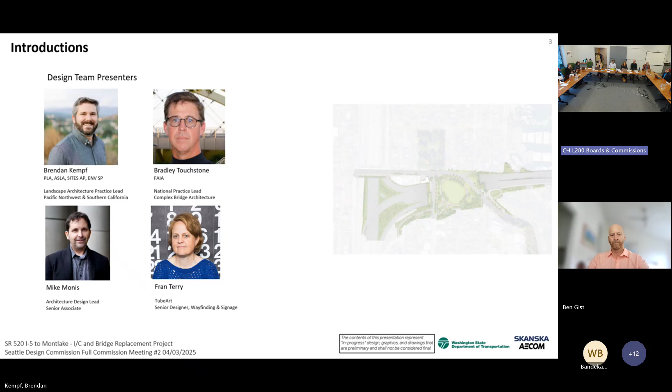So, to pull it all together, we did a quick presentation of introductions for the design team. The four of us will be the primary presenters today. We'll dive right into the project overview.

So you see here, just an overall illustrative plan of the project. This is the final piece of the SR 520 project, kind of the capstone piece: bridge replacement for the Portage Bay Bridge itself, and then connections with the prior project at Montlake, a new lid and open space connecting the Roanoke Historic District, North Capitol Hill, as well as improvements at the I-5 interchange, including a pedestrian bridge that will improve connectivity to East Lake. That topic was covered extensively in our last meeting. Today we're going to focus primarily on the balance of the project.

So zooming in here on the west side, just to highlight a few things. We have the I-5 Roanoke Trail Crossing Bridge I just mentioned, the fire life safety building, the overall lid and open space. And then heading off eastward, Portage Bay Bridge itself, the new bridges, as well as the connector bridge that leads to the shared use path that will be on part of the South Bridge.

As we span across Portage Bay itself, you can see the two bridge structures side by side. And then as we approach the east side, the Montlake connection, connections to the existing Bill Dawson Trail, the Montlake Tunnel, as well as other circulation and connectivity to the neighborhood fabric there.

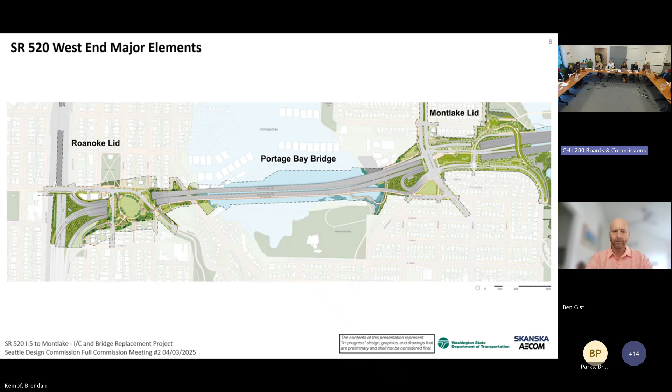We zoom out for a moment and take in the full context. The SR 520 trail network is one of the backbone elements of the project. We're actually extending it all the way across Portage Bay to North Capitol Hill and the Roanoke District, helping to facilitate further connections outward into the community and future connections that will help bring commuters, casual cyclists, and travelers even as far south as downtown.

So the SR 520 bridge all the way across Lake Washington includes the shared use path. The Montlake project continues that through Montlake, and then we are that last piece.

One of the driving inspirations for the project overall is this idea of a distributed network, kind of a river delta, as you hit an arrival point, which you'll see a little later. Really, all of these potential directions that users will be able to go, enhancing the connectivity for everyone using that 520 trail.

The project overall has had many touch points with the Seattle Design Commission going back 6 years or more. It's really a long-term project and vision. Today, we are in the midst of the design build process, so that was a selection with WashDOT. The SDC has been involved, so we have ongoing meetings and workshops with the Design Commission to review design progress as we finalize the design here.

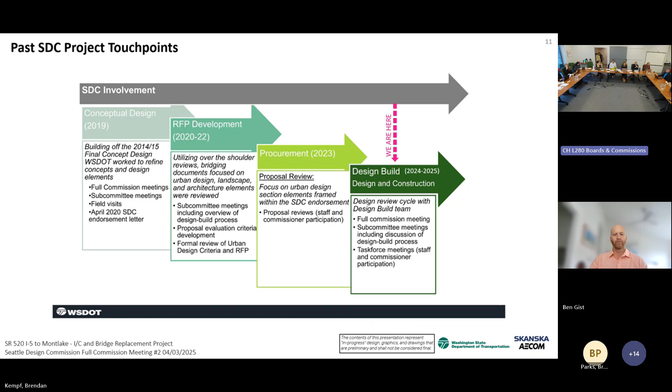That will go through, once submitted, a WashDOT and City of Seattle review process. We'll receive comments back, develop the final design, go through another review cycle, and then the drawings will be released for construction. There are aspects of the project already released for construction, some of the early works that's ongoing, which some of you may have noticed. And then a lot of this urban design, architecture, and landscape architecture will be coming online a bit later.

So our urban design review plan - today is April 3rd, so this is our fourth official touch point with the commission. And we have a couple more upcoming later this spring.

This highlights some of the major topics. You can see we're really focusing on the bridges themselves, the ancillary bridges, the fire life safety building, as well as a design update and progress related to the open space and the overall urban design of the project.

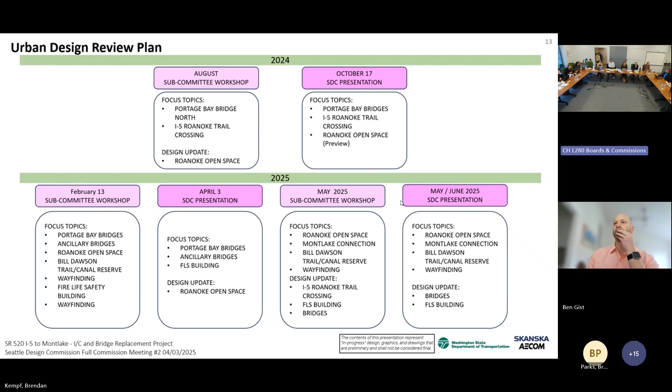When we get to the next couple of meetings, it'll be a deeper dive into the overall urban design and landscape architecture. Some of the major things we'll be focusing on in those next couple of meetings are the materials and finishes, the planting design, gateway elements, and the overall experience and wayfinding. So you may find that some of these topics are not discussed in depth today, but they are coming.

Overall, in terms of connectivity, this is a great diagram. It starts to illustrate that idea of the river delta we looked at a few moments ago, especially as we approach the west side of Portage Bay. We really have our delta moment here, which we'll share in more detail as part of this bridge that will connect from Portage Bay Bridge up to the street level of Del Mar. You see all these connection opportunities, whether it's going north to the Roanoke District, south to North Capitol Hill, west to East Lake, and further afield.

The Montlake connection portion also has tight connections into the Montlake district, as well as additional connections into the community and neighborhood beyond.

So you're looking at Montlake, the existing connection here dashed in as you go through the Montlake project. We'll be talking, starting out talking about this Montlake connection, as well as the Bill Dawson Trail and the underbridge experience there.

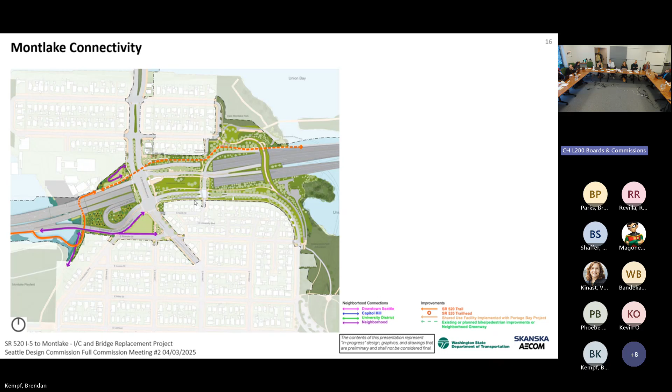Zoomed in a little bit here on the east side. Again, I was describing a moment ago that delta idea, all of the connection opportunities that come off of this trailhead here, you see with the white dot.

And then set the stage for some of the things that we'll keep going back to: wall finishes, really picking up on design language from the Montlake project. So the Montlake ledge, which has these ledges that protrude outward, primarily roadside walls. On the back side of those walls, we have the inverse of that, so a slight impression into those walls. And then where we have pedestrian scaled spaces, this adze pattern, more texture, as part of that pedestrian and cyclist user experience.

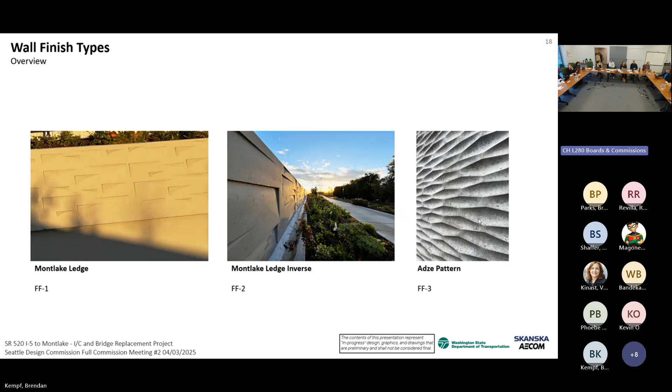There's a number of walls throughout the project, and we've been working with WashDOT and the overall design and construction team on some refinements relative to the original concept design. Won't get too deep into this right now, but the main driver was consistency with some of the surrounding conditions. Where there's battered walls intended for roadside walls, where there was an opportunity to tie into the existing condition, they really ought to be vertical. So a subtle change, but we'll talk about that in more detail at a couple key locations and why that's so important.

Again, the design language picking up from Montlake, a series of various types of lighting fixtures and railings, carrying that same theme through this project with a couple of additions.

We'll have the bridge columns along Boyer. They'll actually be uplit from the bottom rather than washed from above. And then we've also introduced this transitional fixture, which is among the kit of parts for SCL, but helps immeasurably on the west side of the project in terms of spacing, and we'll touch more on that here.

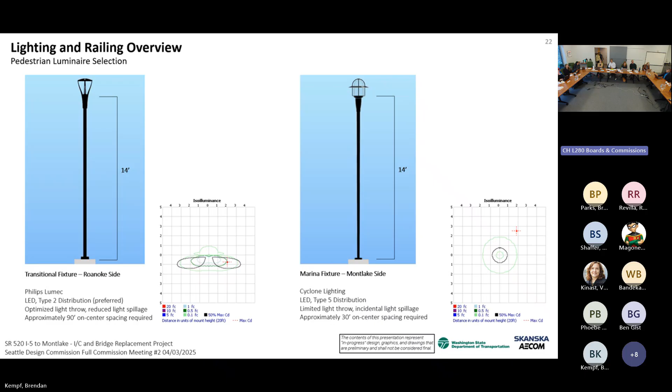Continuing the kit of parts, the design language family, we have a handful of site furnishings and amenities: a single grill, a single drinking fountain at the Roanoke lid, as well as benches that harken back to—one of the things that's so special about our project is that it is linking two legacy Olmsted Brothers projects, which is tremendously exciting for us all.

There's Roanoke Park directly north of the lid, and to the south we've got Interlaken Boulevard. So this opportunity to pull in that design language, the World's Fair bench, part of the design language in the park, even that continuity, is something we're really excited about. We also have the City of Seattle standard trash, recycling and compost receptacles, bike racks, and removable bollards.

And this is the kind of first look at the sign family that we're looking at implementing across the whole project, from the pedestrian level.

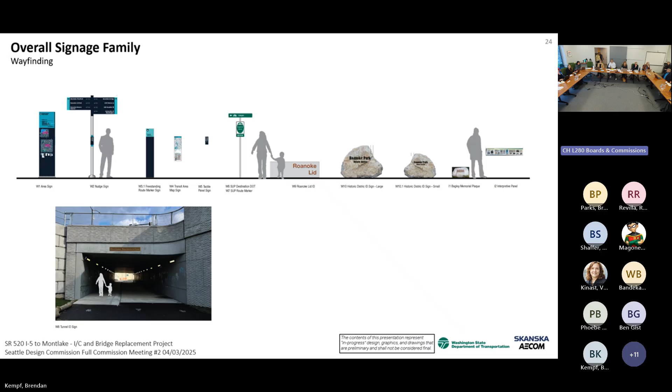So we'll dive right into the Montlake connection. At the Montlake end, it's a smaller sign family because it doesn't include the historic district or the interpretive signage, which has already been done in the Montlake section of the project. So this is just a smaller set of signs at the Montlake end. This is a schematic look at where some of the signs are located along the main pathways where people are going to travel.

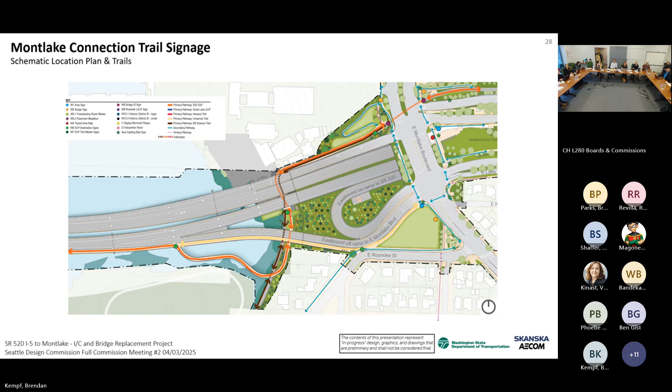You've probably picked up on the fact that connectivity and circulation are underpinning elements throughout the project. Here at the Montlake connection, zoomed in a bit more, you can see the Bill Dawson Trail in dark blue, the neighborhood connections in purple, the SR 520 trail in darker orange, and the lighter orange showing the new shared use paths that will be incorporated and implemented as part of this project.

In terms of bike and pedestrian access, you can see numerous lines here - there's a big focus on this. We've got pedestrian access points, and there's a single stair that provides a shortcut from the grade change at Montlake Boulevard down to the Bill Dawson Trail, going through the tunnel underneath Montlake Boulevard. In blue you can see the bicycle circulation. All these routes are primarily accessible - we do have the single stair, but the slope of these routes is under 5%, so this part of the project does not include any ramps.

As we zoom into that initial connection from Montlake Boulevard, a couple of key elements: we have the stair I mentioned, and we have a switchback path, less than 5% grade, that brings you down to the level of the shared use path, the Bill Dawson Trail.

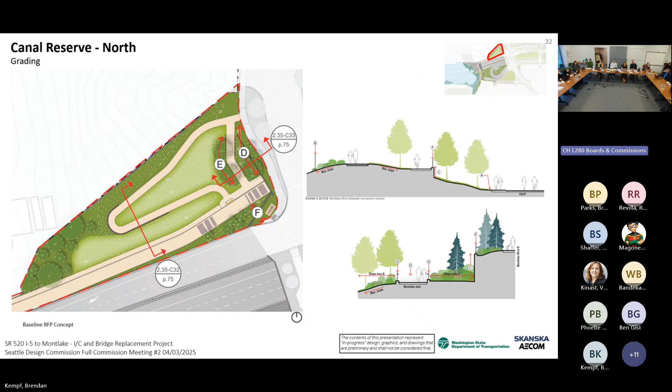These graphics illustrate the initial design concept, the baseline we started from, and then the proposed refinement. The key difference: in the baseline RFP concept shown in the small window upper left, the wall element at the switchback trail is a bit smaller, with a proposed wall intended to deal with the grade change between the existing NOAA facility immediately north of this area. One refinement we're looking at is shifting that wall back to the trail, which you'll see in a couple of views, reinforcing the trail alignment and limiting any disturbance that would otherwise be needed for constructing that wall or negotiating grade changes at the property line.

From the Bill Dawson Trail, this is a view looking westward. You can see the Portage Bay Bridge off in the distance, and the switchback path leading up along with the stair coming down.

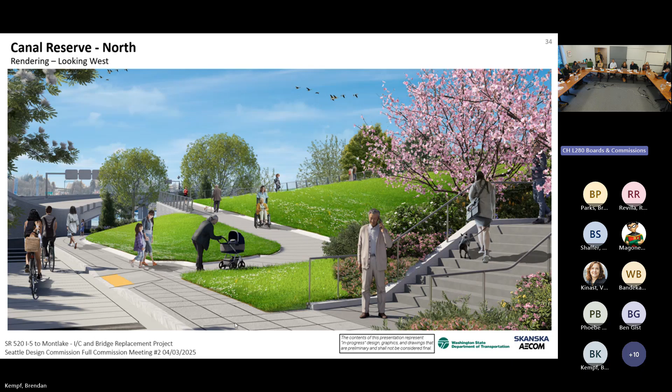As we go through this space, some design refinements relate to the walls. Initially, some of these roadside walls highlighted in light blue were intended to be treated as roadside walls with a 10-to-1 batter. Those walls also tie into fascia walls that help screen the bridge abutments and enhance the character of these under-bridge spaces. When we took a closer look, one proposed refinement was to make those walls vertical so that as they approach the fascia walls shown in cyan, there's a smooth transition rather than an awkward interface between a battered and vertical face. This series of diagrams highlights these walls.

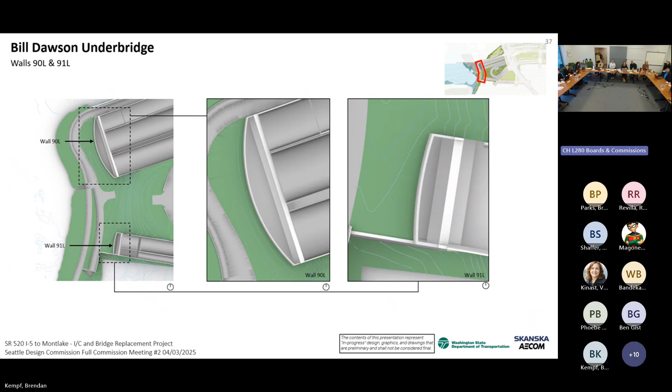But this also conveys that design language here for these two walls. They do have a subtle arc to them, and then as they have this return, they go back vertical and tie into those roadside walls that I just mentioned. So looking at the first one, the larger one, this is underneath the main bridge, the abutment.

Rather than having that kind of very utilitarian flat face of the abutment wall itself that's supporting the termination of the bridge, we have this fascia wall that will extend outward and just kind of reinforce the path alignment and this arcing experience through the space.

What you see here, these panels that are mounted to the wall are going to be a buffed stainless steel, so they'll have a reflective quality to them and play off of the underbridge lighting. There's a series of path lighting as well as girder wash lights that will help illuminate this space so it doesn't have that same dark character that the existing condition does. So it'll be a much more pleasant experience for cyclists coming through this space.

In terms of these reflective panels, they have varying sizes, so they kind of modulate up and down - kind of fingers that will stick up in between the spaces, between the girders, those girder bays. I mentioned that lighting going through there as well - it'll help illuminate the space, and the slight angle will allow some of that light to come back and hit the trail itself.

So we've been getting into some of the more technical details of how this will be constructed and fabricated, and you can see here just that kit of parts - from the actual face of these panels, the frame that's supporting it, how they're going to attach this. That outside face that's arcing is also still battered, so that helps give it more character.

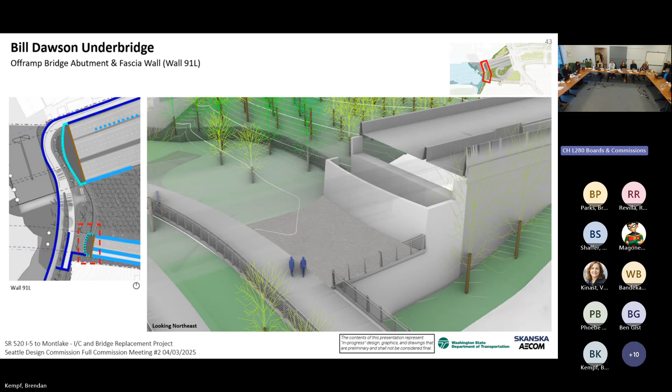A quick rendering of what that space will look like. Similar character, we do have the open space between the off-ramp and the main bridge that will be densely planted. And then we have the same kind of ground treatment and some of those habitat logs in the underbridge space.

Also want to point out the railing type here that you'll see in several places. This is the West Approach Bridge North railing type. That's another design language element that's carrying through much of this project when we're on the actual bridge structures.

Touch briefly on that space in between the off-ramp as well as an on-ramp and the main bridge. This continues to be in development here, but this is illustrating that baseline design concept that we had. The main change is that what you see at the inside of the on-ramp loop, there was a series of stormwater infrastructure elements. Those have actually been shifted to the outside of the loop, more conducive to some of the slopes, the pipe slopes, and how that drainage system would work. So there's going to be a service turnout on that west edge there.

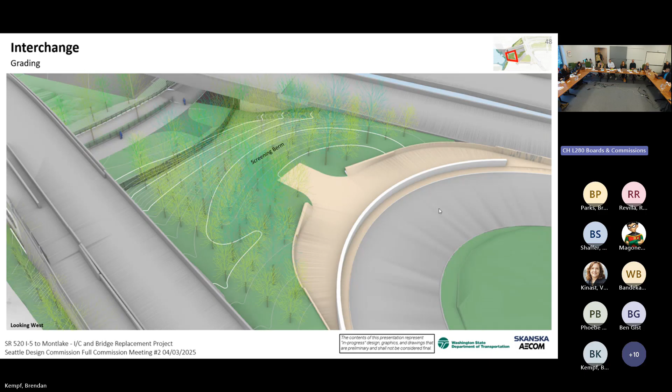Another view looking a little bit more westerly, back down to those same underbridge areas. And that kind of leads us to the bridges.

I'm going to have to stand up.

Good morning, I'm Bradley Touchstone, bridge architect with the design build team, and I want to carry you through the main bridge portion of the project. I'll touch on the overall design layout to give everybody a refresh of what the major components are, and then we'll touch on the ramp to the Bill Dawson Trail. We showed that diagrammatically last time, we've got a lot more refinements to that now. We'll also touch on the main bridge and some of the refinements and changes that have been made to it since you saw it last. And then we'll talk about the ramp to Delmar Drive, so really the overall, big picture of the total project.

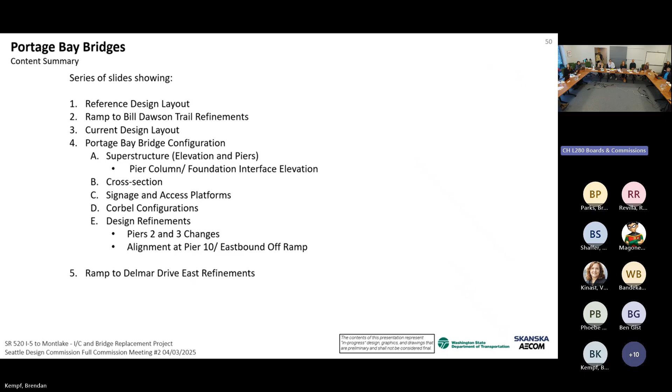These are the main components for what we call the Portage Bay Bridge, the main bridge project, which is the Portage Bay Bridge North structure, the Portage Bay Bridge South structure. We've got the eastbound off ramp, we've also got the RSUP ramp down to the Bill Dawson Trail, which is a separate structure, and then the loop ramp, which is the ramp to the Delmar Drive.

When we met last time, there was a request made that we show an overlay of how this compares with the existing alignment for the current bridge. So you'll see this is the Portage Bay Bridge North, which will be the first structure that gets constructed, and then the Portage Bay Bridge South, and then the red dashed lines are the outline of the existing bridge that's there today.

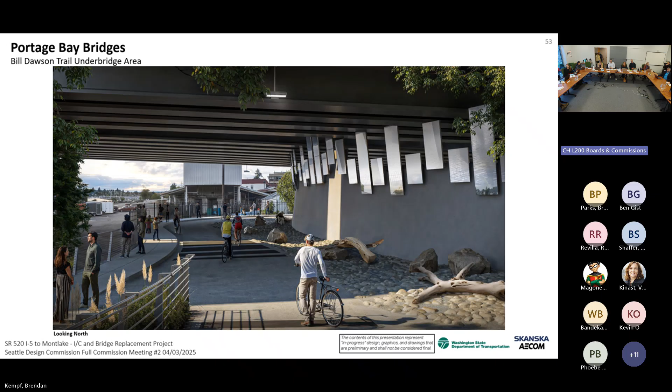Picking up where Brendan left off, what an amazing transformation. When I saw the existing photographs compared to what this space is going to be like, it's really pretty phenomenal. So as people are coming under the bridge on the Bill Dawson Trail, they're going to be able to connect up to the RSUP trail on the main bridge via the ramp structure.

This is from L1, so this shows the original configuration for what that structure looks like. You can see here's that Bill Dawson Trail, and then we get onto elevated structure over water connecting with the SR 520 trail. The structure itself is a trapezoidal box structure cast in place with simple rectangular columns to reflect the same architecture of the main bridge.

And so the current configuration for the bridge is very similar. We've made a couple of little minor tweaks to the alignment. Last time when we talked, there was a desire to really ease up that intersection as much as possible so that you don't end up with an abrupt normal angle to the RSUP. So we've really tried to ease that as much as possible. And then also looking very purposefully about where that connection falls relative to the pier locations for the main bridge and the ramp structure. We'll talk a little more about that in just a minute. But overall configuration is very similar to what you see in L1.

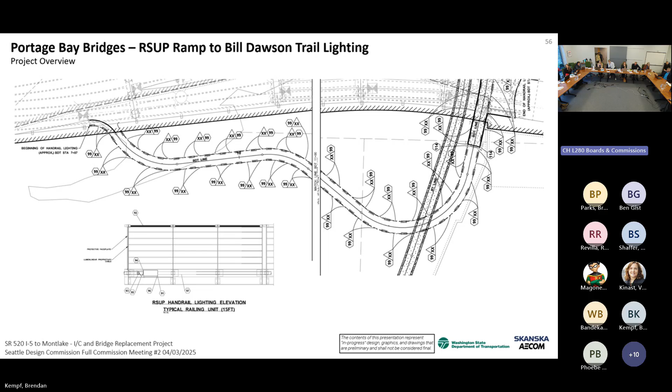Lighting for this structure is going to be via the integrated illumination on the railing itself. This is just a quick layout showing how that illumination is going to work, where all the fixture placements are going to be, and what that overall detail looks like. This is the Wobbin rail, but it has the lighting integrated into it.

And then you can see here the 3D axonometric view of the ramp structure.

The main bridge, this shows the overall configuration of it with the pier locations. And so we're maintaining those very long, parabolically arched main spans. We've got piers 1 through 12. Piers 1 and 12 are actually the abutments, and then 2 through 11 are the primary piers for the structure itself. It does transition from a trapezoidal box structure to a beam structure as you approach the east end of the project where the ramp structures are.

And so here you can see the overall configuration of the typical spans for the main bridge with the parabolic haunches, the tapers per the concept plan, with the chamfered rectangular cross section for the piers. Something we're missing. Is that too fast?

Okay, there we go. So this is the cross section of the bridge at Pier 6. This is where a lot of stuff is going on. You can see that we've got the equipment platforms, which we'll talk a little more about in a minute.

One major change that you'll notice is that the foundations for the main columns are now above water, whereas they were at the mud line originally per the concept plan. There was an ATC during the proposal phase which elevated that transition from the column to the shaft off of the mud line. The design team has elected to take advantage of that ATC for a lot of reasons that we'll talk about in just a second. That places the transition at an elevation 2 feet above mean high water, and this would be the steel casing for that shaft would be stripped, so it is a concrete element that's extending up, not a steel shaft. It comes up above the water.

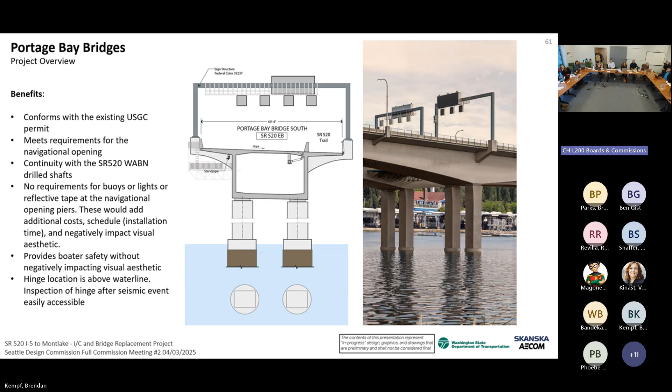As we go through the rest of the bridge presentation, you'll see that change has been reflected on all the renderings, so it'll give you a sense of what this means in the totality of the structure.

We talked a little last time about the equipment platform, and we had some very basic diagrams. We've now gotten a much more detailed design concept for that. One interesting thing you'll notice is there's actually a little telescoping bridge section. These two equipment platforms can be connected to one another so maintenance crews can go back and forth between the two structures without having to go back up at the main deck level.

Also, right now this rendering shows a little vertical picket. That will be a wobbin rail, same as the RSUP at that upper level. It'll be a much more industrial kind of railing system down at the equipment level, but that's not something anybody's going to ever see, really. You can see right in there is where that equipment platform exists down at Pier 6.

When we met last time, there was a request that we get a view from the water line looking up to get a better sense of this. So these are the equipment platforms at Pier 6. You'll notice we're keeping the bottom of the maintenance platforms above the bottom soffit of the superstructure itself, so they're mostly concealed from all the reasonable vantage points around the project.

So again, overall design layout. This really illustrates the locations of the corbels, the secondary architectural tempo created by those corbels. You'll notice the magenta ones are the primary corbels, and the blue ones are the secondary corbels.

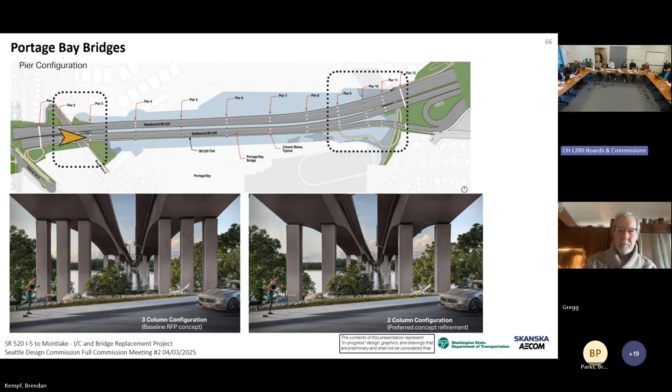One thing we talked about last time was the reconfiguration of the piers down at Pier 3, switching from a 3-column configuration to a 2-column configuration. I think we all agreed that was a good idea. It really begins to open up the view shed. It's also consistent with the architectural language of the other piers along the water span. Here you can see what that view looks like.

Another change to the pier configuration we didn't touch on last time is what's happening down at Pier 10, where the eastbound off-ramp occurs. The base concept called for all these columns to be lined up constant, on center basically. As we're peeling off that eastbound ramp, we wanted to twist the alignment of those columns just ever so slightly to get them normal to the radius of that curve. You can imagine if those things are skewed, it creates a lot of complexity with regard to beam placement. So we looked at it in plan view and also in the model in 3 dimensions.

What we determined is that the main north and south Portage Bay Bridge columns still align with one another. These are pulled far enough away that that slight change really doesn't make any visual impact to the structure.

Here you can see this is actually the pair of columns we're talking about right here. Also included in this rendering is the step, where we're transitioning to the beams. You can see, and this is allowed per the concept plans, there's actually a small step in the superstructure depth for the ramp only. That allows us, because that ramp's coming down, to thin up those beams as much as we can in order to accommodate the head clearance down at the trail. That's why you see that little notch right there.

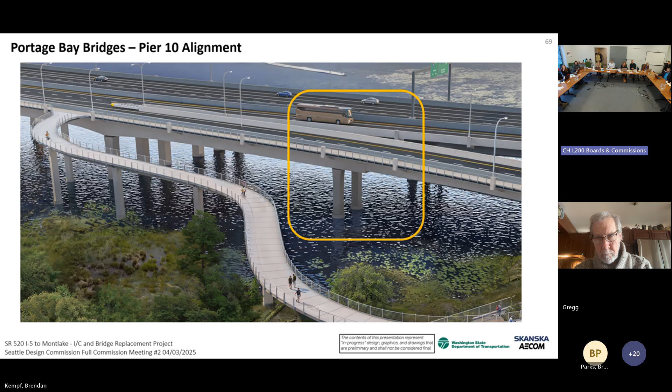This is again that same view looking west from Boyer. These are the kind of overall renderings that we prepared for the project so far. Here you can see now looking south, picking up on the above water foundation and the visual effect of that. We've also included all of the signage, the lighting, the corbels, and the drainage system—a fairly comprehensive look at all the little nuts and bolts of the project.

And then again, view looking north towards the marina. And then at night, obviously the main bridge itself is not illuminated, but the roadway lighting at the deck level will provide some lighting.

This is going along the RSUP towards Delmar, towards the lid, and that leads us to the spiral ramp, which you can see here. This is again from the RFP. This is the concept configuration where we've got this coming off of the bridge, and then you can see the spiral ramp as it connects to Delmar, again with a cast-in-place closed cell system for the superstructure.

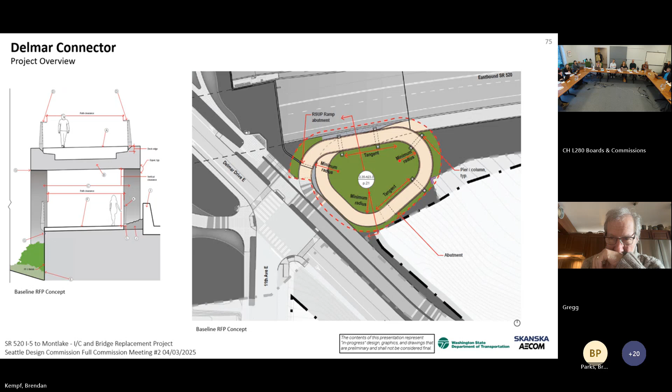So our configuration is very similar. We're following very closely what was conceived in the concept plans. We're coming off of the main bridge and then rotating up to Delmar.

One of the things we have done is shift the abutment slightly down at the lower piece right here. Because we're chasing grade, we wanted to create a little more headroom at the abutment so you can get up under there and inspect the bearings. It also really helps us balance the spans—it compressed the spans on the lower portion of the ramp a little bit, and allowed for a more efficient structural design.

We're still working on the abutment in this location. What we're going to probably do is slightly take this radius and turn it just a little bit, skew it slightly more so that we're getting more normal to the radius of that curve. But it'll create some continuity in terms of how that abutment relates to the wall configuration.

Similar to the ramp at the Bill Dawson Trail, illumination for the spiral ramp will be via the illuminated rail system.

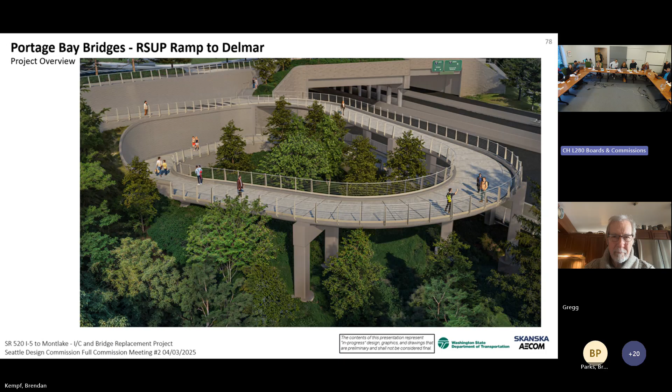And then here you can see in axonometric view how all that stuff begins to come together. You can see that we are chasing grade pretty severely as the project drops off. So this is the relocated abutment here, and then all of the different wall types, the portal underneath the lid. So all of that, the composition of that thing, I think, is really kind of coming together.

Okay, I think we want to pause and see if there's any questions. Or do we want to wait until we get to it? Yeah, we were planning on covering all of the bridge and ancillary, and then go into discussion. So if you're done with the bridge, okay, great.

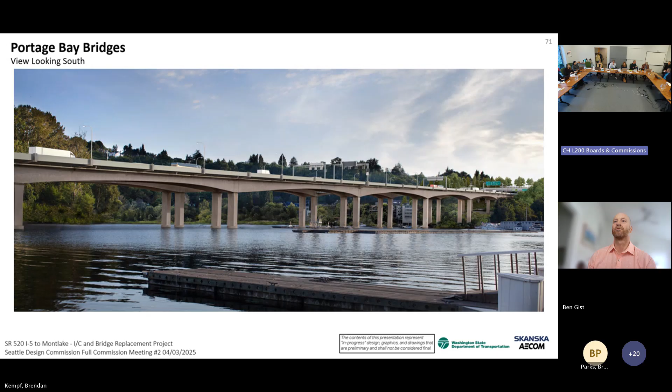Okay, do you have any more follow-up? One more. Okay, on a different item, going back to the beginning on the Montlake connections. I know that back in the day there was a really extensive community planning effort for that whole Montlake lid. So I don't want to go back in time too much, but as the design has evolved and we've got to this point, how has the community been kept up to speed on where you are now, or what the latest is?

This one did work on the Montlake project. Probably when you touched this last, we had a tunnel underneath SR 520 just east of the current proposed abutment profile, and CPTED issues kind of worked against that as a good principle. We did incorporate some of the principles that we're trying to use with the basic configuration shown today: direct and intuitive, open, and meeting the CPTED principles of environmental design. So, yeah, that all makes sense.

If I can respond back to that, yeah, they are flared.

They're slightly smaller, but they're the same flare top. So it's essentially the same form, only slightly smaller. In some cases square instead of rectangular, but same family, they do have that flared cap.

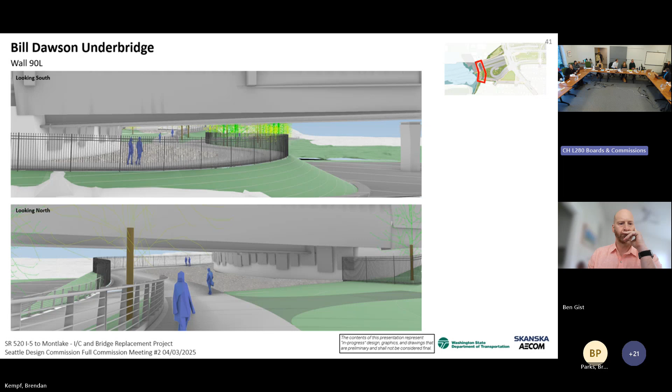So what Matt was saying, as you see that 6-foot fence winding around, that's what you're talking about, right? Into the picture, on the other side of the fence is the NOAA facility. As you come under the bridge, WSDOT has an agreement to lease the space under the bridge for parking because it's contiguous with their parking lot. That fence is there for security under the bridge to protect that parking area that NOAA will use, part of that security. So that's why there's a transition at the south end. Brendan can speak to the location of that transition, but that's why the 6-foot fence extends under the bridge. Does that make sense? Does that help?

It tells me what you're thinking. Yeah, thank you.

Can I just ask? There's a pretty rendering that shows this space from the trail to the south. This one here, that one's very generous. So I think that's not the sensitive fence, right? It's not the 6-foot fence and it's not the 10-foot high clearing, right? So this is better in both of those worlds.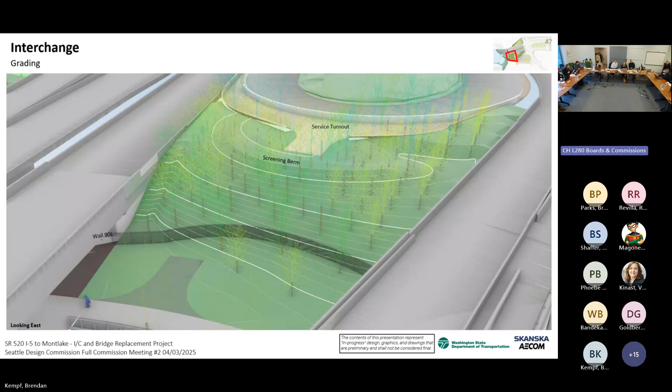Thank you. Okay, any other questions, or do we switch to conversation and deliberation? Let's switch. Anybody like to lead off? Let's go in order then, right?

Oh, Ben. I thought Ben would chime in if he had a question. Just one. Yes.

Oh, well, what do we think of this, guys? It's been a few minutes since we saw the last version of this. Some of us have been in subcommittee. I think the improvements are going in the right direction. What are we thinking of in terms of next steps, things we'd like to see more of, advancements in certain areas? I think our questions seem to be honing in on specific aspects, so that kind of plays our hand a little bit.

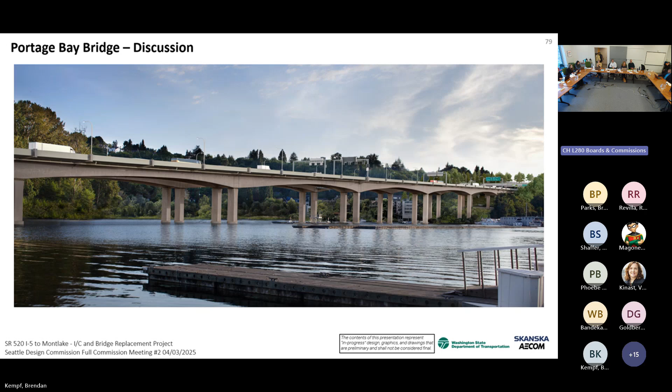All right, so we're really picking up where we just left off. Bradley kind of teed us up with the Delmar connector bridge. It's this spiraling kind of corkscrew—we affectionately call it the corkscrew ramp—that gets us from the bridge level up to Delmar and points beyond.

So in this portion, we're going to touch on a lot of the west underbridge area. We're going to start at the Delmar connector bridge and some of the refinements there, drop down along Boyer, work our way up along the north side where the new Roanoke stairs will be, and then continue on our journey.

So this is highlighting the circulation opportunities here. First and foremost, it's really about the connection from the shared use path along the 520 trail on the Portage Bay Bridge south, and how we get up to the level of the rest of the surface streets there, and then starting to see some of those connections take form out and beyond.

Here we go—so highlighting the different modes of connectivity. We have the bicycle, shared bike and pedestrian access primarily along that shared use path. We do have existing sidewalks down along Boyer, and then we also have pedestrian access points along this pathway that leads to the top of the Roanoke stair, as well as the steep slope along Roanoke to the bottom part of the Roanoke stairs.

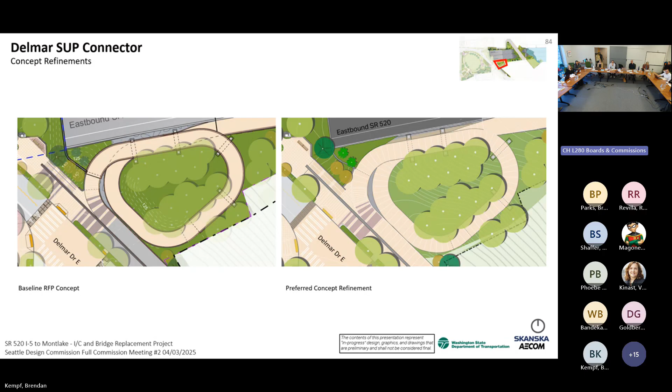You can see its configuration here, hugging closely to the shared use path. We've actually tucked it back a little bit, and when we see that 3D view, you'll get a sense of why we made that refinement. So this is showing that overall composition.

You can see that kind of singular plane of the roadside wall and the upper abutment. Initially, a couple of these walls were classified as roadside walls, which would have that larger Montlake ledge with those protrusions you can see out there today. However, that's generally meant for roadside conditions, and here we have more of a pedestrian scale space where bikes and pedestrians are going by. So we've worked with the team to refine that to add a more textured pattern that relates to those pedestrian spaces throughout the two projects.

Here's the base of the Bagley stairs and the seat wall adjustment. Initially that seat wall was hugging the edge of the path, helping us negotiate the grade change from the upper level down to this access point. This is generally a 2-to-1 slope through here, so it's rather steep. But by tucking this seat wall back a little bit, we've accomplished two things: we've eliminated any conflict with that bike runnel so there's no protrusion that could become a pedal catcher as people are shooting down, and by tucking it back ever so slightly, it gives enough room that if somebody were perched on that seat wall, their knees and legs aren't dangling into the path. So we've given a little niche for people to tuck into there.

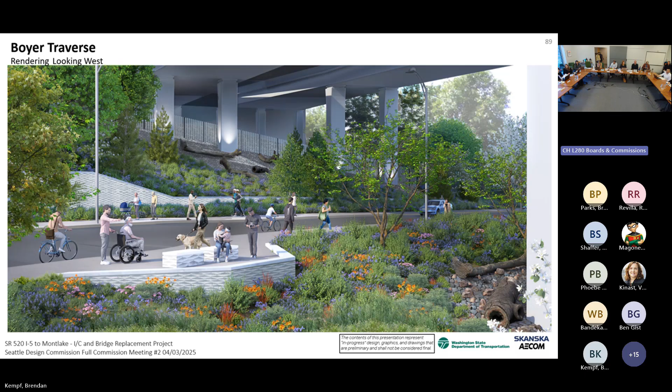Also worth noting, we do have a viewpoint, an overlook here - this is the Boyer overlook that is looking out towards the bay. So another small gathering space with a couple of seat wall benches that offer these same finishes tying in with the rest of the project. This area becomes directly in dialogue with everything that's going to be happening up above at the lid level as well.

And then a view outward. You can see those bridge columns out in the distance. This will have a view out into Portage Bay. This area will get revegetated and replanted. Again, some areas underneath at Pier 3 will have that same underbridge treatment, and there will be some restoration elements down at the water's edge as well.

As we continue around, wrapping from Boyer, this is the Roanoke Stair area. There's an existing flight of stairs that leads down a zigzaggy path, and it actually comes into where this future roadway will be. So we'll be reconstructing those stairs.

A couple refinements here. With the stair itself, we've reoriented this last little portion with the kink, so it's actually a straight shot all the way down, improving sight lines through this space somewhat. Also, the stair up here is broken up into 3 shorter stairs to help negotiate some of the grade change there.

We'll see in a moment a couple other slides. You can see that we start to introduce a series of walls. We're currently working on this. This is part of the grading challenges and constraints we've got here, trying to maintain slopes that aren't excessively steep through this area, but also addressing minimum soil depth cover to support all the trees and vegetation on the lid, and then the configuration of the stairs themselves.

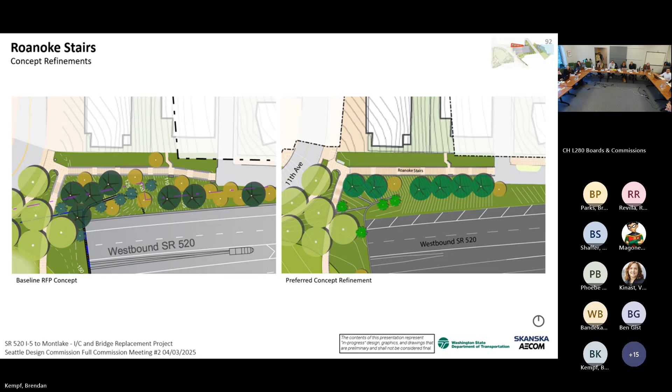Next slide. Here's an overall view of that stair. You can see that straight shot, over 50 feet of grade change through this area alone to get down to where Roanoke picks up again.

There are existing residences on the north side here. One of those residences has an existing footpath that comes off the existing stair, so that's one of the things that will be reconstituted—one of the constraints we have for where we locate some of those landings. You can also see another element of security fencing, part of the overall ensemble of these portals we'll touch on in a moment, similar to what we saw down along Boyer.

You can start to see where those terracing walls come into play to help negotiate that grade change as we go around that portal wall and tie into the Roanoke stairs. Some of this is also driven by the fact that 11th Avenue is rather steep in and of itself, so there are a lot of grading constraints as we try to get everything to tie in this area.

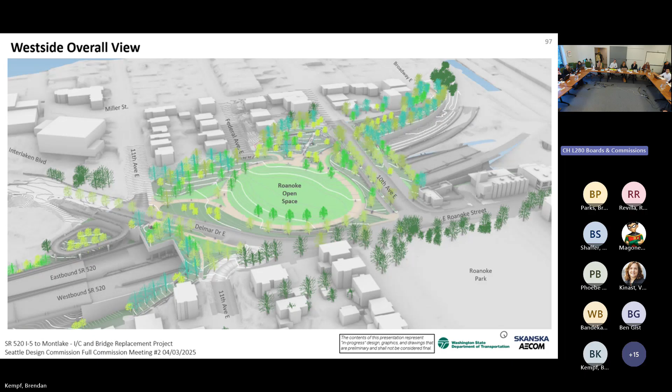We're looking primarily south in this view, so you can see 520. The bridges themselves are ending right about here, that's Pier 1, the abutment. You can see the Delmar SUP connector bridge right through here. We were just looking at the Roanoke stairs that come up. This is an exciting view because you start to see how all of this is coming together. We're going to start looking at some of the trailhead elements over on the far side, as well as along Delmar, touch on the fire life safety building, and then we'll get to Roanoke open space.

So overall, again, starting off with a series of circulation and access diagrams here. This is looking primarily at the neighborhood connections from the streetscapes. Starting with that trailhead element, it starts to branch out. We've got all the connectivity to the Roanoke stairs to the Roanoke district. As we work around, we have a connection that goes through the open space, ultimately comes out to Harvard at Broadway, and then we also have those connections out towards Eastlake.

You can see here the bike and pedestrian circulation routes, so there are some dedicated bike routes as part of this area. In terms of accessibility, we do have a primary pedestrian access route that connects all of these spaces that is fully accessible. There are portions of this area that follow the roadway grades, so we do have areas that are over 8.3% in terms of grading, but those are tied to the roadway rather than new pathways that we've created.

So starting out at the trailhead, this is the Harvard Trailhead at Harvard and Broadway. A couple key refinements, but overall this is generally the same configuration. Again, this theme of grading constraints plays out throughout the project. One of the refinements we've made is with the Olympic ramp that comes from 10th down to the Harvard Trail - that got extended a little bit just to make the grades work.

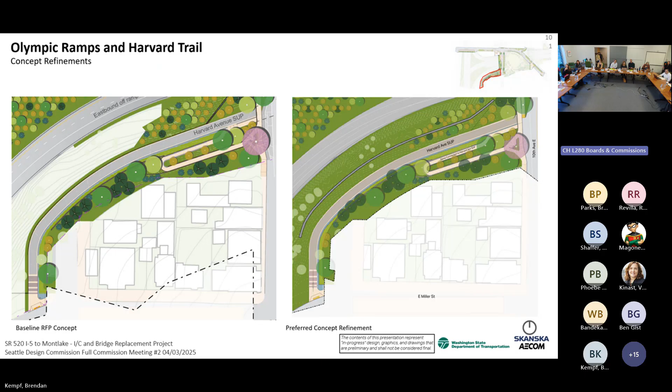But the main thing that changed here is this wall. There is a retaining wall as part of this slope. The original design had that wall basically be the north edge of the trail. As we've developed the design and explored this area, we've actually pulled that wall out from the edge of the trail. This has a number of benefits, including some of the geotechnical issues with this area, but it also helps to open up the trail considerably, and we'll see that in the next slide.

So with the railing types, originally, because that was a wall with a sharp drop off right at the edge of the trail, you would have another one of the guardrails 54 inches tall right at the edge of the trail. Now as that wall has been decoupled from the trail itself and pulled away, we actually open that up considerably - we don't need a railing. That wall itself will protrude 42 inches above the grade behind the wall, the ground line there. So the wall itself will be kind of the guardrail element, and at the trail level, it'll be much more open.

The portal wall experience is a really important aspect of the lid, and so a lot of those roadside walls associated, particularly with the portals, have that 10-to-1 batter. That carries through, but as we approach the section that follows the alignment of the trail, we actually transition to a vertical wall at that point. That simplifies some things in terms of constructability and all the rest, but also given that it is tucked back from the roadway, it will still have the same finish - you'll still see that Montlake ledge pattern across the face of that wall.

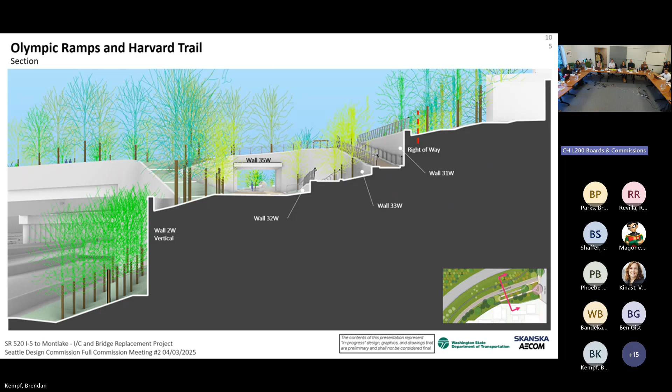The next slide is a little further back. We've made that transition to a vertical wall, quite subtle. You can see the switchback portion of the ramp starting to emerge. One nice thing about all of these portal walls is because the wall height itself is 42 inches above the ground line, there's no extra fencing needed. There's no visual clutter that comes along with that.

So this is looking at the grading within this area, between wall 2W that you see here and the ramp system that brings you down to the trail level. And then another view from up on 10th, looking at how that works its way down.

We'll touch on this outlook area in just a second. So this is the Olympic outlook, with a good view of the Olympics in the distance. We'll talk about some of the minor changes and refinements there.

This totally gets into the weeds, but what we've been looking at really closely over the last several weeks is how all of the different railing types and guardrails come together, making sure that there's a clean continuity between the handrails and how all of that relates together.

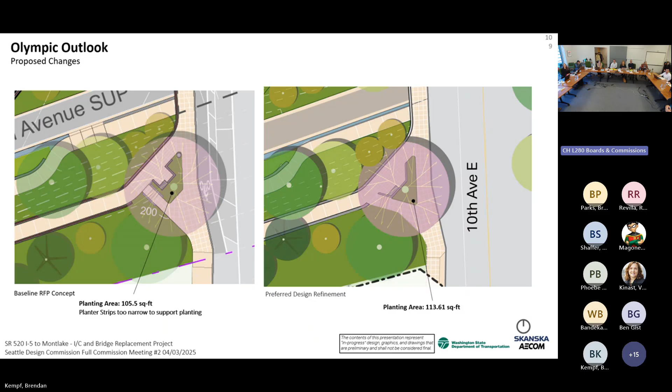We were also able to expand that planting area supporting one of the specimen trees ever so slightly, about 8 square feet, but every square foot counts when we're trying to establish big, beautiful urban street trees. And there's a couple of views of what that space looks like.

10th Avenue, as we all know, is quite steep. So on the south end, there is a short stair that helps people take a quick shortcut to get access to the ramp. There's a more generous and graceful option to go through that outlook space. You can see that inverted parallelogram form and the seat wall there and how that ties in, which also includes companion seating as part of that seating area.

This is a great example of some of those touch points and advocacy and discussions with the community. We heard back asking why aren't we doing the same thing on the west side of the street? So that's been incorporated into the design where we maximize the area we've got, with that separated bike lane that follows the sidewalk and dumps out further to the south, similar to what's happening on the east side of the street.

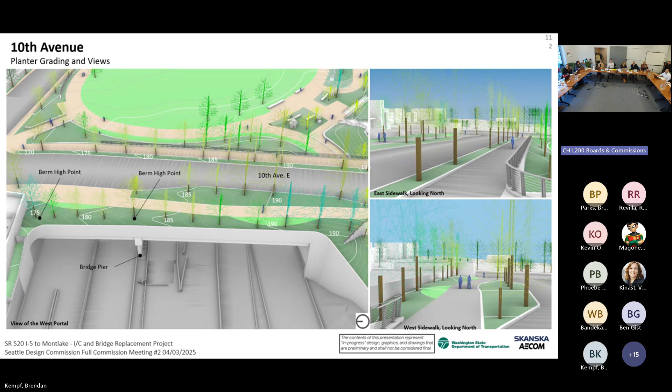So a couple of views here showing the west portal. This is the general area we were just looking at, reoriented a little bit, but you can see the wide, generous sidewalk on either side, as well as the grading. We're berming up pretty much everywhere we can, maximizing the soil depths in these planter strips and planter areas for all the trees that will be planted here.

Where we don't have sufficient soil volumes or we have limited surface area for those planter areas, we will have Silva Cells that provide additional root zone area underneath the pavement. Those Silva Cells are stacked structures that help support the pavement without compacting all the soil, so there's looser soil that the tree roots can grow into, which also helps with water and oxygen exchange.

Looking at the west portal, I want to highlight some elements here. We already talked about wall 2W that comes around, maintaining that 10-to-1 batter. You can see that subtle transition where the batter carries through until it intersects with the vertical face. As we work our way around from south to north here, the face of the barrier, the parapet of the structure, continues that same 10-to-1 batter.

So we're talking about now the Fire Life Safety Building. As the name suggests, it's an unoccupied building. People don't work there, don't spend any time there. This is just for the fire equipment for under the lid structure. It sits at the corner of Roanoke and 10th.

We tried from this stage moving forward to make the building slightly smaller. Once we knew what equipment was going inside, we tried to get it as small as possible and minimize the impact of it.

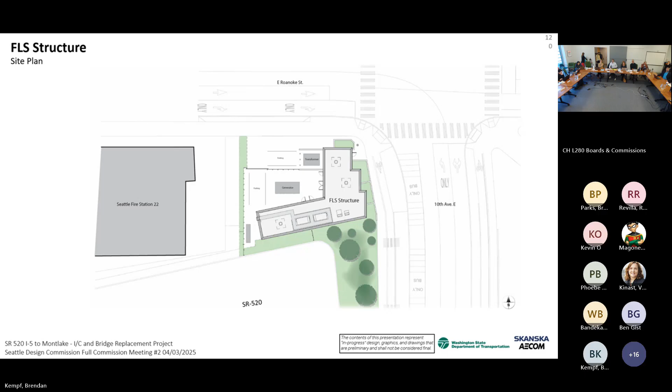Here's a site plan of that area. The yard consists of a parking space, and there's a rolling door here to get equipment in and out. There's a fairly sizable generator needed to support the equipment and a transformer out here, with a parking space as well for maintenance people or anyone who has to come to this building during an event. As Brendan talked before, this is the landscaping that wraps around, terracing along the building at the corner of 10th and Roanoke and wrapping around to get landscaping there, as well as between the fire station and the building itself.

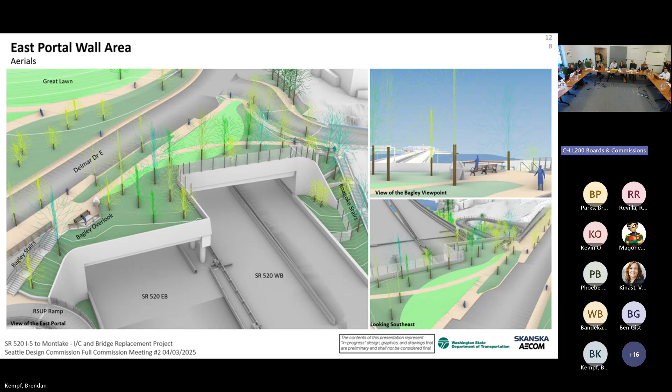Then where it comes to this sharper point that projects outward, we're just acknowledging that point rather than trying to round that or create a fussier form. It just honors that geometry of the battered parapet coming together at a point. That also helps to line up with the pier cap element. Again, as on the west side, having the full width or extent of that pier cap extend up through the diaphragm that's encapsulating the girder and beam ends through there.

This is that same design language, that parallelogram for all those outlooks I mentioned earlier. But that element right next to the Bagley stairs, we looked at that seat wall and the slopes a moment ago. And then the next slide starts to look at the soil cover. Again, a number of trees through this area, ensuring that we've got sufficient soil depth coverage for those.

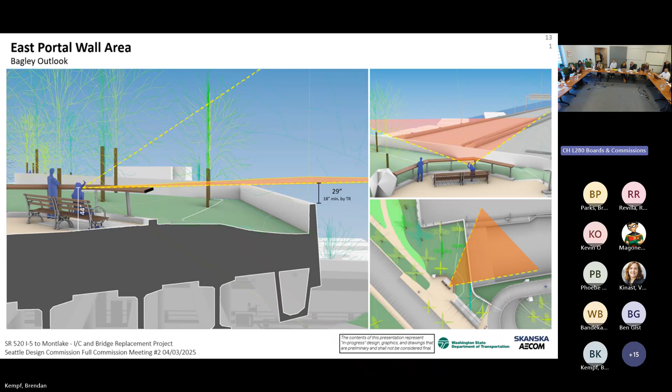Then at the Bagley outlook itself, that same design language, that lean rail element helps to frame in that space. In this case, we don't have a fall zone on the other side, so it's not technically acting as a guardrail, which allows us to keep that area below the lean rail more open, just stanchions and posts supporting that. Then you can see how the grading works with the overall slope of the structure below, and also where that parapet element gets set below that viewpoint. So it does afford a good view out for anybody standing or sitting in that space.

Similar to what we saw at the west portal, the height of the wall is in part driven by the soil depths beyond, trying to keep that as a relatively consistent datum line, because the south portion of the structure does project further eastward. There, it will ultimately be a little bit shorter along that face. The transition to a slightly taller barrier where we're further back will occur just within that section that's not really oriented towards the traveling public on the highway below. You can also see that pier cap condition that extended all the way up as part of the diaphragm.

That covers our journey around the Roanoke lid, as well as the streetscapes and the fire life safety building. So it's our next pause for clarifying questions, comments, and discussion, and then we'll pick back up with the Roanoke open space brief.

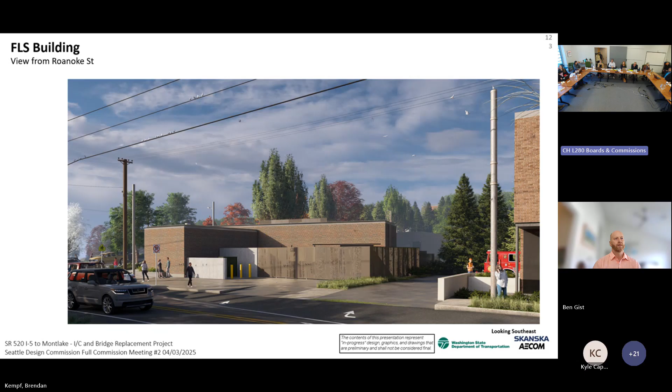Anyone have questions? Actually, I do. Clarifying the materials I'm seeing here: I see the brick, which also flags the corner. I'm seeing a concrete wall that's about 4 feet high, maybe 6. And then I'm seeing the metal fencing. I don't quite understand what that is. Could you describe it a little bit? I was looking at the documents, but if I could just have a verbal description.

It's a metal perforated panel with a custom design inspired by the tree image below. Okay, so it's a perforated metal panel. And how tall is that? That's 9 feet.

And is the concrete wall about 6 feet? Yes. The fence originally was 8 foot, but you were able to see the generator peek up behind it, so that's why the fence is now 9 foot. And the concrete walls are pretty much requirements for the transformer, as well as the yellow bollards. Thank you.

I had a question related to the Delmar shared use path connector. I know we talked about this in subcommittee. I'm curious, recall one conversation was about whether those columns could walk underneath the path itself. Is that something that's been explored, or is that for the next phase? That is something for the next phase. Yeah, it's something we are continuing to look into. Just wanted to make sure now that we've looked at it together. Yes.

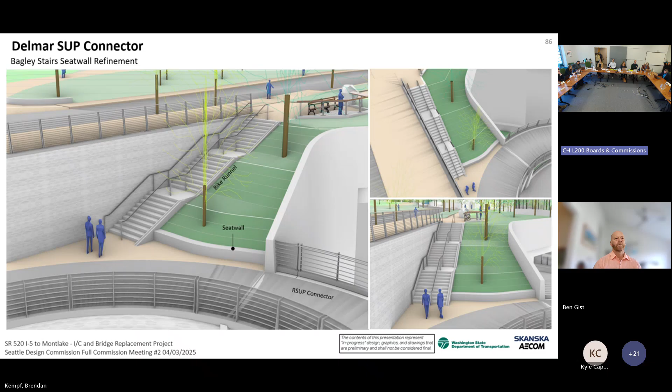Let me get to the beginning slides. So I'll use my cursor here. Within this zone, the lower portion of East Roanoke Street is incredibly steep and challenging, so that sidewalk will follow the natural grade. This pathway that comes off the sidewalk and cuts across the lawn has some portions over 5%, so this is not part of the accessible route, given that it leads to that short flight of stairs. The portion along 11th Avenue also follows the roadway grade, so it is above 5%, but still qualifies as part of an accessible pedestrian access route.

I think we'll see it a little further along, but the areas along 10th, and also this row of trees along East Roanoke Street, that zone is also following the roadway grade over 5%, on the south side of the street.

Could you go back one slide? The one with the 3D bird's eye view. This one, correct. For any of those walls, has there been any thought of working with a local artist for a mural opportunity, or is that something that's ever been explored? So the wall texture being employed here, we did bring in Murasaka to help inspire that design. It's part of the element of continuity. But no murals.

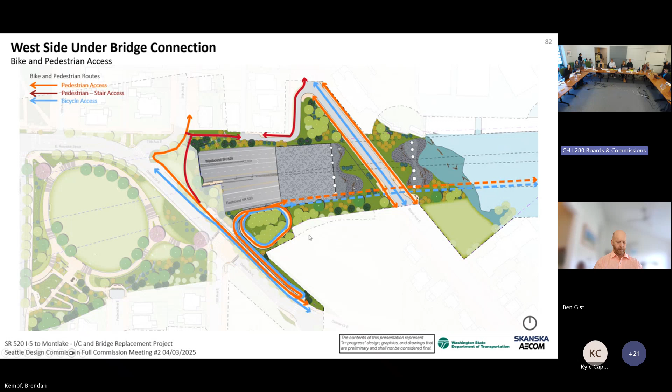You can see at one point, and perhaps in one of the views we looked at before, that shaded zone and dashed line represents the edge of the right of way and the spatial constraints we have to operate in. We are coming relatively close to that point.

So we really are maximizing what we can do within the space we have available to negotiate that grade change. This is a great question — I've actually gone down a really tight radii turn while biking, and it's not a great feeling. I understand the design constraints you're working within, but I've had the same question about sight lines. With a tight turning radius, you want to make sure you can see, particularly if you're going uphill, who's coming downhill. I presume those sight lines will be very open so you can see what's coming, in either direction.

Do you think this will be striped, so people don't cut the corner and run over somebody coming the other direction? Currently, this is not striped, which is consistent with the 520 trail as it crosses. The caveat is we're leaving that to the final designer as far as resolution, channelization, and signing.

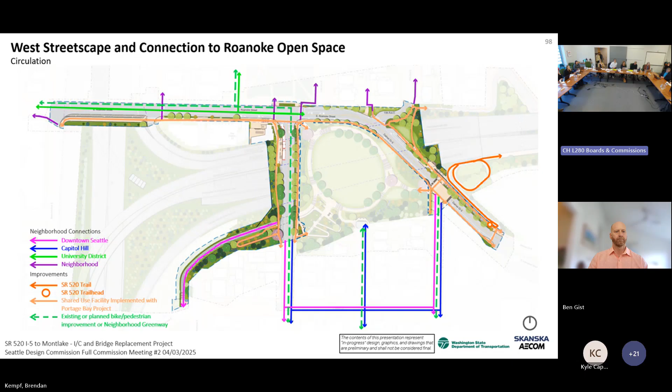May I just make one very brief comment again about the fire and safety building? It's a project that calls out not only for architectural input, but for the input of visual artists to present them with this building, whatever its final determination is, to make it something that's visually really appealing. Not necessarily architects or engineers or other designers can achieve that.

To me, I had a couple questions about this area. If I could maybe plant a seed. We do have an overlook that seems to be right in front of a bunch of trees. I certainly love the trees more than I think I love that overlook. How do those two go together?

So one of the things as the design comes together and is refined is that we'll be prioritizing that view shed out from the overlook. So this is not necessarily the final location of these trees, meant to convey the general massing through that area.

We do have, let's see, that is about a 20-foot, roughly 16 to 20-foot grade change from the overlook down to the lower portion. So the trees directly in front of that space would be intentionally selected to have a lower stature rather than - that's not the place for the massive spectacular oak. So we will be carefully looking at the plant selection.

That's one of the things that'll come up in our next series of workshops and presentations. But yeah, so we will be prioritizing that view out so that the entire purpose of that space is to celebrate the view of the Olympics beyond. We want to do that.

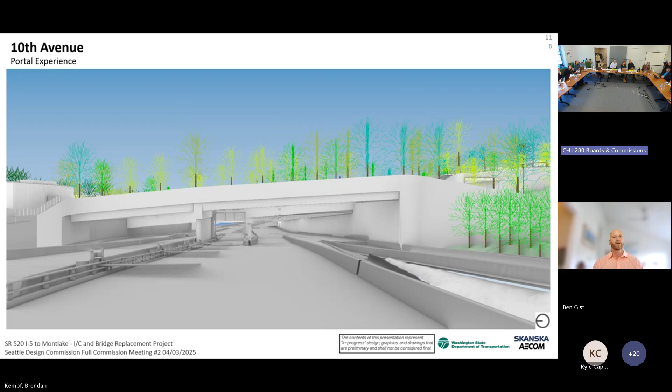Can you highlight over the portion of wall you're referring to? Yeah, that next step - it's like you're underneath the stairs and you see the next tread down. Brendan, isn't that actually the girder face? Yeah, no, there is...

A wall here. And on the left, it's the wall where we step down into the park adjacent, and that is a wall that's visible to the park side as an expressed architectural wall. And it is visible on this side to vehicles, and it's...

On the right, I think it's 15 feet tall. On the left, it's much less. Correct. So it's a pretty substantial...

And the pattern is applied on the wall that it's perpendicular to, is that correct? That'll be - yes, in front, in the foreground, those walls will have that Montlake ledge pattern. So the one parallel to it, in front of it - but the walls perpendicular to that - oh, the ones that... yes, sorry, the ones alongside it along the roadway, those will be smooth.

The abutment walls are smooth. The finished walls on the opening are textured. Correct, yes.

You want to follow up with that at all? I don't have another question. Okay, talk about it in the discussion section.

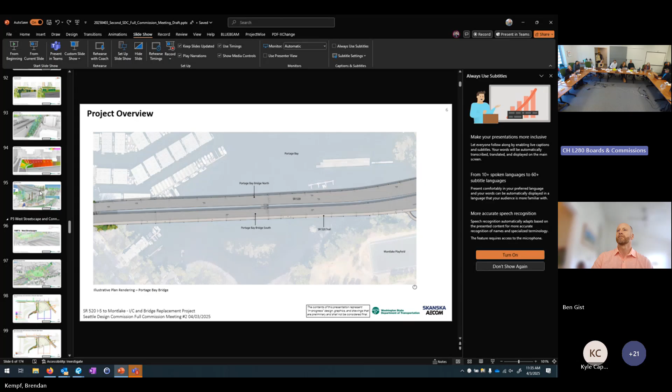Give me one second, slideshow's kicking me out. So this will look like this.

So, the bridge pier here in the center. The first piece is the pier cap, on the west side, though it does happen on both sides. There's a slight difference, but this is at least a consistent face.

The difference on the east side is that there's a kind of zigzag to the edge of the structure. But we're trying to carry the same language through from the roadway level up to the base of the parapet.

So opening up the columns, there's an aspect of permeability from one side of the roadway to the other, and kind of open airflow there as well. We have cylindrical columns that come up and support that pier cap, which is continuous, directly above the pier cap itself.

You almost can't tell because it's the same volume in this view, but there's what's called the diaphragm, which basically encapsulates the ends of the beams that span across. So we're keeping the full width of that pier cap all the way up through the diaphragm.

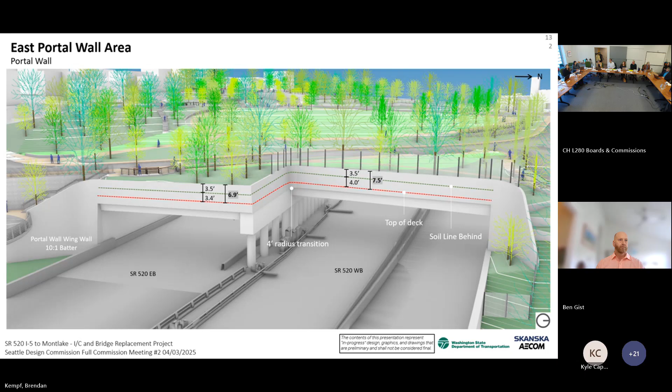Have vegetation opportunities been explored? That's my question -- as quickly as you can answer, have vegetation options been explored in the building? And not just that, as a clarification, is there a planting strip along there? That's not clear.

It seems that it's not. There is not a planter strip at the backside of the curb through there because of the turning movements involved. There's quite a wide driveway apron to support that.

And then the rest of this question, and the rest of landscaping -- it's largely driven by those access constraints along the north face along East Roanoke, which preclude the ability to really introduce substantial landscape in its current configuration.

Is the massing that you inherited causing this transportation issue? Is there something we can do to solve that parking movement by changing the massing of the building? I understand you've inherited some parts of this. Let's go to the diagram from the concept design.

From an overarching urban design perspective, when we initially started there was a question within the design team of whether we could reorient the building and open up the corner more, so that we actually open up some sight lines.

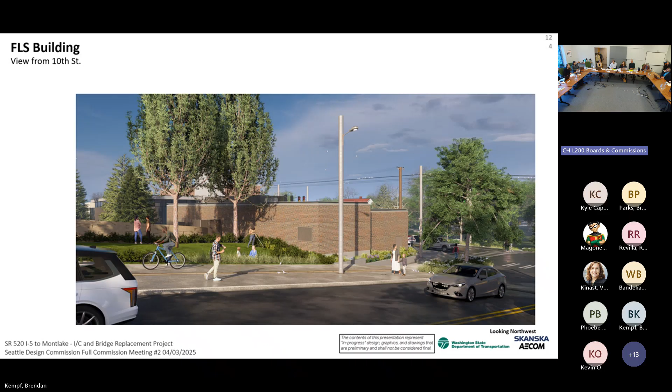I think, unless there's something very urgent, I might park additional commentary on this section so that we can skip into the next and final section.

So I will try to do this succinctly and briefly here. I know we are short on time. The good news is that this area in particular will be the primary focus of our next workshop and our next presentation, so this will be on the briefer side, but we do want to cover a few key things and refinements we've been working through. We're really excited to take an even deeper dive in our next series of touch points here.

Fran, I'll let you start. Again, this is the entire same family - they'll be seen throughout this entire in-depth project, with more detail in the next series. There's more to come. And then a schematic view of where signs are located currently, and pathways.

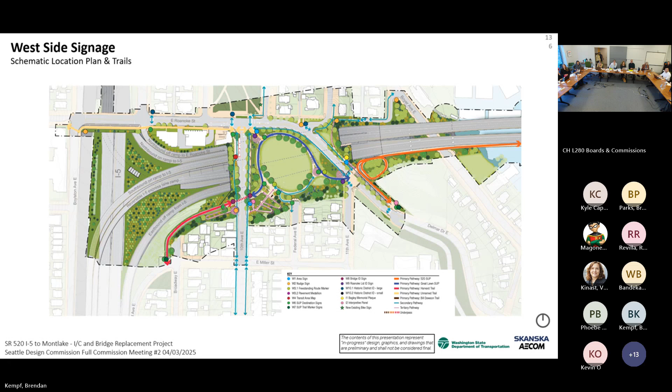So this open space ends up being the nexus of a lot of the connectivity. Again, the grade change is one of the elements that's driving a lot of this, creating this long oval loop path that connects and ties into the tunnel that goes underneath 10th to connect out to the Harvard Trail. You can see it's part of the connectivity out to the intersection of 10th and Roanoke at the north end.

Potential connections along 11th—pretty steep there, so you better be good at biking if you're charging up that hill—but also a connection into the community, into the neighborhood, North Capitol Hill there, right at Federal with a small outlook and stair access to them.

So circulation areas: you can see where you see the orange and the blue, that's where we've got the combination of bicycle and pedestrian routes. The red is primarily pedestrian access or stair routes.

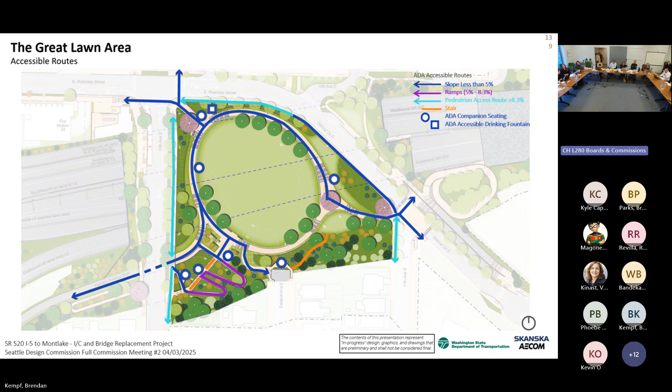In terms of accessibility, this is the slide that is a little farther down along. These cyan areas highlight the areas around the open space where we're following the natural grade of the roadways, and it's steep, but we're providing a consistent accessible route—that's the dark blue all the way through, including the switchback ramp at the Cascade Stair and ramp in the southwestern corner.

So real quick, touching on the grading challenges we mentioned—we're trying to make up and catch as much grade as we possibly can through this space. The color coding corresponds with the different levels of slopes.

This is the lower portion we refer to as the Great Lawn path, because it's separate—not truly part of the shared use path itself. That portion is your shortest distance. We've got about 25 feet of grade change just across this bottom lower area alone, so we're making up for that through this lower portion.

But we do have zones where the slope shallows up to about 2%. That corresponds with where we have bench locations for users to pause. Along the northern edge, that's where we've got the steepest slope, charging upwards, still under 5%, heading towards that Roanoke gateway element, and then around as we get down towards that tunnel element.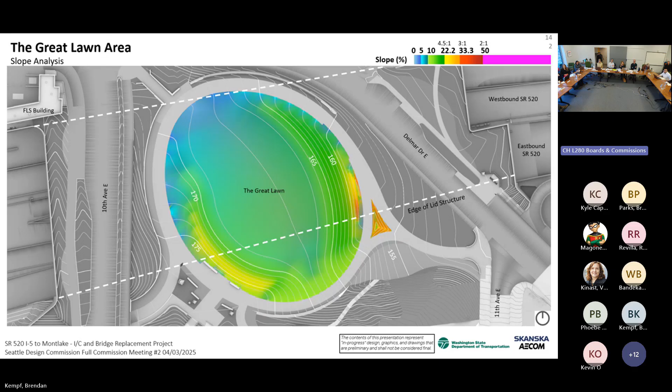This is a quick look at a slope analysis specifically of the Great Lawn area. You can see about two-thirds of that is on structure—these heavy white dashed lines represent the edge of that structure. The central portion of the Great Lawn has the shallow slope, where people can gather, toss a frisbee, any kind of passive recreation. This is showing a cover depth analysis, so you can see we're really leveling out that portion of the Great Lawn.

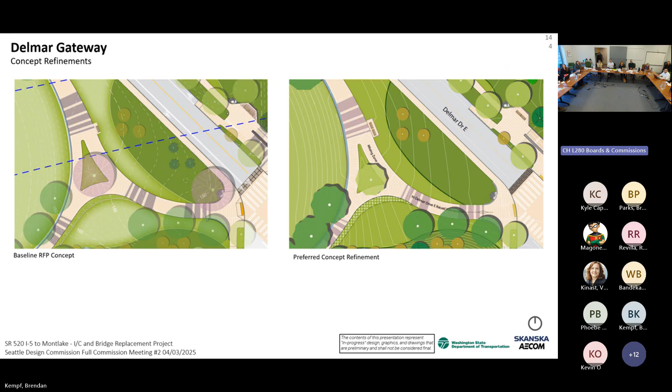Starting here at the Delmar Gateway, really minor adjustments or refinements. One is that we've included a set of removable bollards as part of that entrance. The biggest change is that we've located a pair of benches here. Initially there was an idea of having a bench along that incredibly steep, almost 12% portion we saw along the bottom edge. Rather than negotiating access to that, we've set up a pair of benches here similar to another bench location on the west side of the Great Lawn.

So just a quick view of that space. This is the Delmar entrance, with the Bagley Stair right over here. This is a raised crossing that will allow people to come across, favorable for cyclists getting across, with no curb ramps or changes there. There's a pair of seat walls as well as that kind of frame that entrance as well.

As we wrap counterclockwise up, we're approaching the transition from Roanoke to Delmar. We do have a significant grade change through this area between the pathway and the sidewalk. So the refinement here is largely exactly where this wall falls, as well as extending it a little bit in either direction to help accommodate that grade change.

Initially, the idea for this wall was that it would be a rock face wall or a dry stack rock wall, but given some of the constraints here, as well as technical requirements, that precluded the ability to actually do that once we got into the grade changes involved. So that evolved into a typical landscape wall that would have that adze pattern, that texture we've seen throughout, still picking up on the overall design language here.

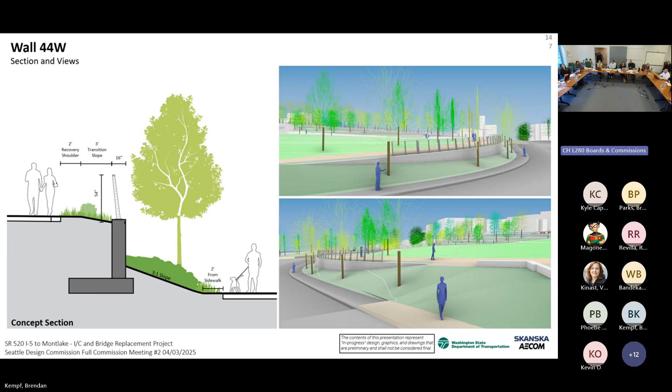Given the grade change, that will introduce a guardrail element where necessary along the top of this wall. One of the other benefits of using a typical concrete wall here is that it gives more space back to those street trees that are set in between the wall and the sidewalk in this case.

This is just helping to indicate those extents where we have different levels of fall protection needed, the bare minimum being at the full extent where there's more than a 30-inch fall. You can also see where the wall height approaches some of those heights. The cover depth analysis is also one of the benefits of how we've configured the wall, maintaining sufficient cover for those trees where possible.

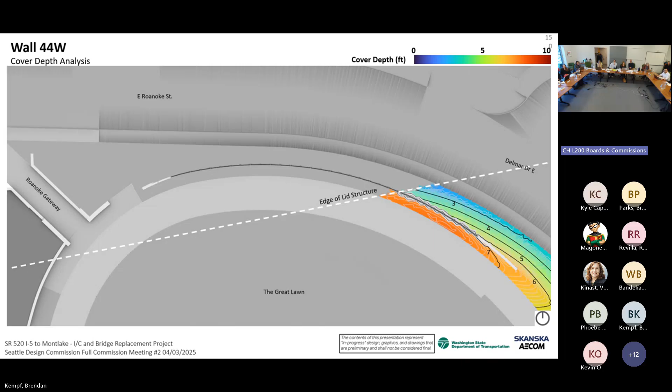Continuing a little bit further, this is the Roanoke Gateway, the primary entrance right at the intersection of 10th and Roanoke, directly catty corner from Roanoke Park. This area has some subtle refinements. We talked a little bit about how that wall we were just looking at extends a little bit further in. This is also the location of the single drinking fountain on the project. The wall on the other side also got extended through.

We'll see this on the next couple of slides. Trying not to get too into it since we've got a lot to cover, but the general gist is for this last portion here, after we get off the lid structure itself, we are increasing the grade a little bit so we can pull the steep portion of that sidewalk back further and give level space back to the intersection.

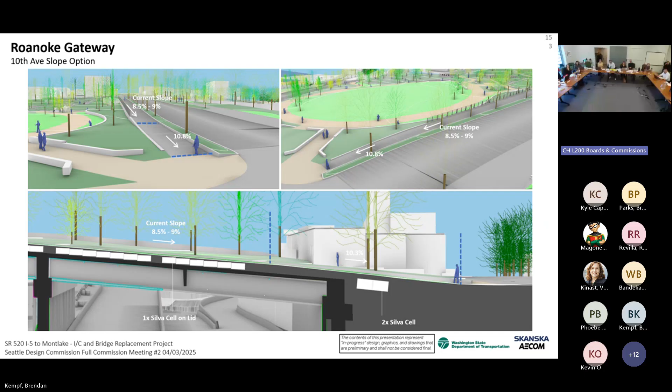So a couple more views generally showing that. Really our constraint is the edge of the lid structure down below, and pretty much as we get a little beyond that, we start to have a slight angle break, steepening up that sidewalk ever so slightly, but overall improving that intersection and that gateway area.

And then this is a view of that space. Continued refinements are of course in the works, but you do have the ensemble of the various design elements coming through, whether it's the paving patterns, the seat walls with that adze pattern framing the entrance, or that specimen tree, intended to be a magnolia, that will go in and be part of that entrance. There are also continued refinements you'll see next time related to the signage and wayfinding elements at the entrance.

As we keep going along, I mentioned that one wall we extended a little bit to improve the soil depth at the edge of the structure. We largely kept the wall alignment consistent. This is a really critical wall because we're dealing with the grade change from a very steep slope along 10th to a more or less level, relatively level, open space.

The main refinement here was that initially, the concept was that this wall would have a series of steps, which would be a departure from a lot of the design language throughout. The intent was that it would provide more opportunities for informal seating, for people to perch upon and treat it like a seat wall.

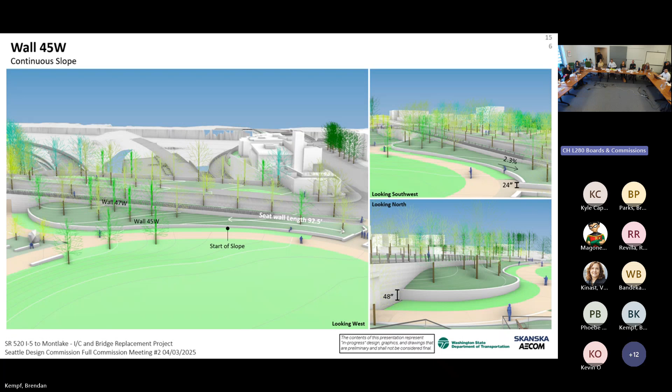So you can see here a look at the grading. The big difference here is that we have a gentle slope up from the edge of the path towards that wall, where the informal seating will be on the northern portion. We're really trying to maximize the grades behind that wall to minimize how much of the transition between the two lid structures is visible and exposed.

The cover depth analysis here is also very telling. This is where we get the most separation between the lid structures, the most grade change between the two structure decks we're working with.

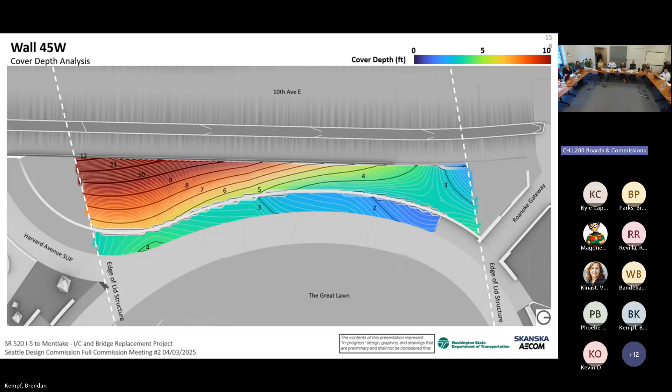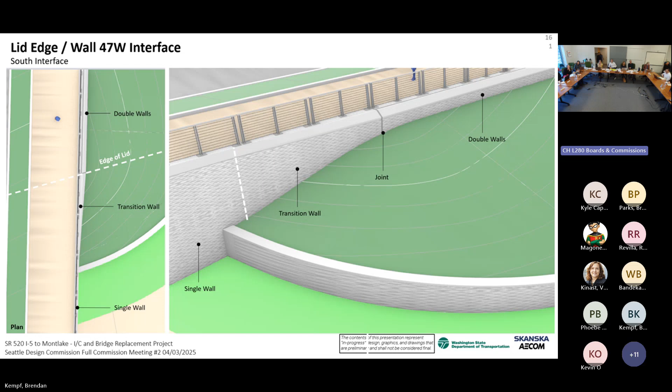And we're carrying something similar through on the south side. It's different because we don't have a retaining condition by the time we get off the structure. So we're really just pulling that same feature, that same profile all the way through and letting it gracefully peter out right there at the edge.

As we work our way down a little bit further, we have the cascade ramp and stairs. Generally this similar layout, the principal parts being we have another outlook element. We have the stairs that lead down to the plaza. We also have this switchback ramp connection there. This is an important part of the accessible route that can get folks up to the outlook itself and also this southern portion of 10th Avenue.

So we have roughly a 25-foot grade change through this space as well, so quite a lot. Some of the refinements that have been done, really just extending the ramps a little bit, again those grading constraints and the need to get a little extra run to make this all work. We are working through some refinements related to that community table and grill that'll be at the bottom, part of that overall plaza.

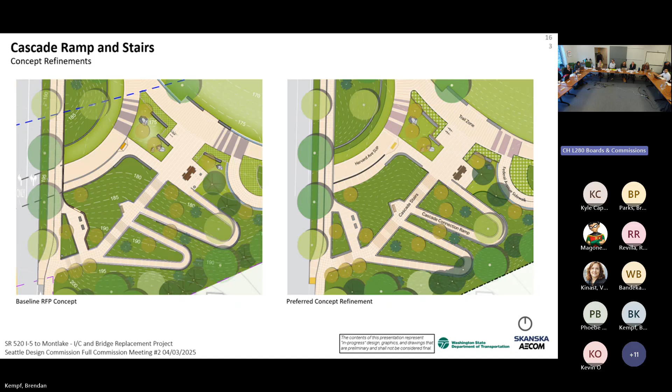So we won't get too much into that today, but I think the next slide covers an overall view of that, so you get a sense of the scale of the grade change from top to bottom.

These ramps, it's a subtle thing we're not highlighting per se, but one of the things we talked about at length in our recent workshop was the visibility and treatment, whether we add an extra railing type through this space. When we actually took a closer look at adding in a more open, what we call our type 2 guardrail through there, we do have some grading constraints. Wasn't so bad. It really helps, and then we avoid having to try to wrap those walls around. We're chasing a consistency element, but once we really dug into it, this worked out a lot better and opened up some of the sight lines into that switchback there.

Speaking of the grading constraints, you can see what we're up against here. I mentioned almost 25 feet of grade change. We do have a portion here at the southern limits where we're bumping up against that 2-to-1 slope, kind of maximum to get the grades to work out and also to be able to wrap them around these ramps, but trying to keep a 3-to-1 maximum, at least within the primary spaces in between the ramp and the stair.

A quick view of that. So you can see the 2 seat walls here in the foreground, part of that overlook. You can see that parallelogram, that lean rail element. We do have a fall condition, so this one does carry through the cable railing element.

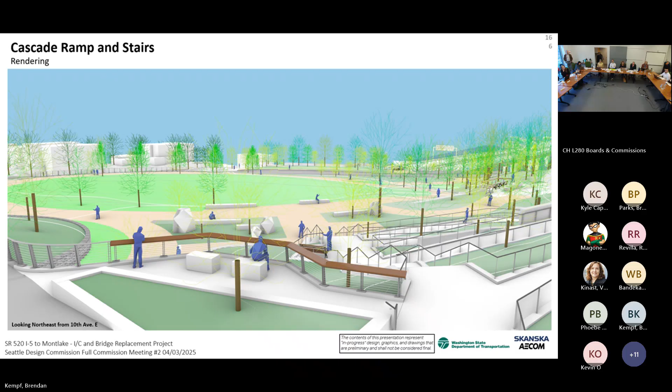And see the next slide, have a little bit more of a real view of that rendered out. You'll note here there are areas of turf block as part of the pathway, helping to facilitate some of the maintenance vehicle access that's required.

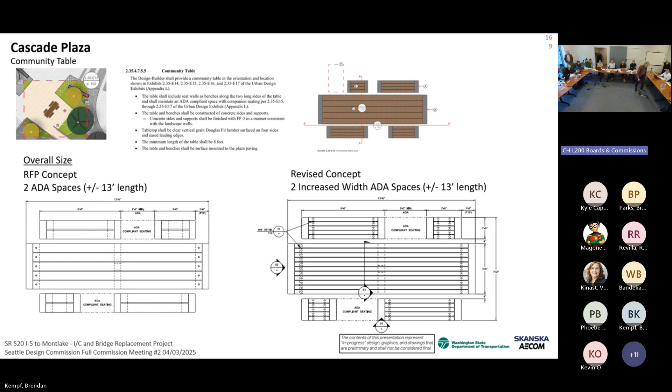Zooming in on the community table here, this is something we've been refining, the layout in particular we've been working through. If we go to the next slide, we've got just some subtle refinements and adjustments to the size of that table that we're working through, including companion seating on either side that can favor the views outward across the Great Lawn. So more to come on that.

And then lastly, the Federal Outlook. So this is that connection, a more intimate connection for the community, for the neighborhood, largely keeping the existing conditions through there.

There are some potential changes afoot. We do have some issues with some of the utilities here. There's a number of different types of utilities, all at the end of federal, that we're working through. Looking to minimize any changes overall, but that's one of the things that will be coming back in our next series of meetings with you all.

So a couple of views of that space. It's another outlook. It's got that lean rail element. We do have a rock face wall down at the base, kind of right along here.

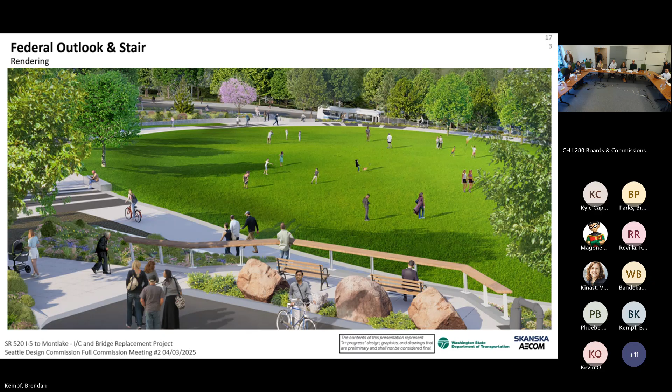I think that's it. So I know that was fast. Yeah, I know we're short on time. I was trying to be quick. But there will be a lot more of all of that. This was more of a preview of some of the key refinements, some of the things we've been discussing in the workshops that we wanted to share.